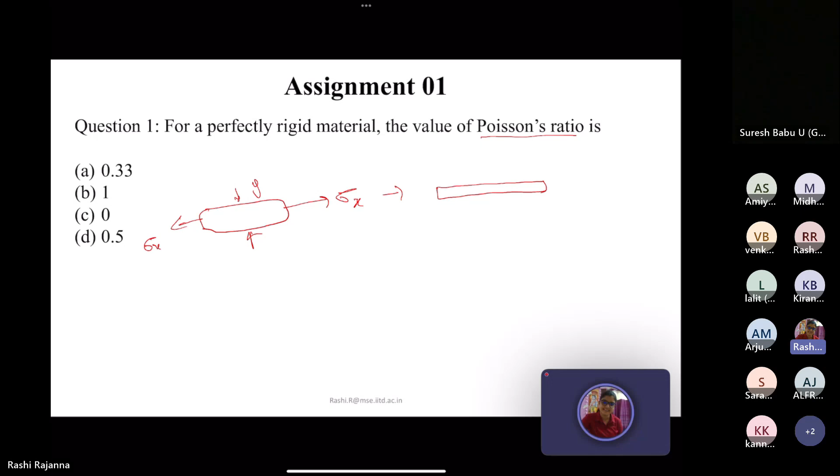That's the point. That's what the Poisson ratio gives us. When we apply load in the longitudinal direction, the direction perpendicular to that becomes the lateral direction. So how much the material gets deformed in the lateral direction is what is discussed using Poisson's ratio.

So consider the material was like this before, and it got elongated in this direction, and it initially had length Lx. So what will be this length? If the total deformation is delta Lx, what will be this? Delta Lx by 2. Correct. Delta Lx by 2, because it happens in both directions. In 3D, it will also happen along the Z direction. The variation in length will be there in X, Y, Z, all three directions.

And when we consider the strain of the material in the x direction, what will it be? The change in length, how much it deformed in this region as well as in this region, divided by the original length. So when you have to see how much it deformed in the y direction, what will it be in the y direction? Can anyone tell me?

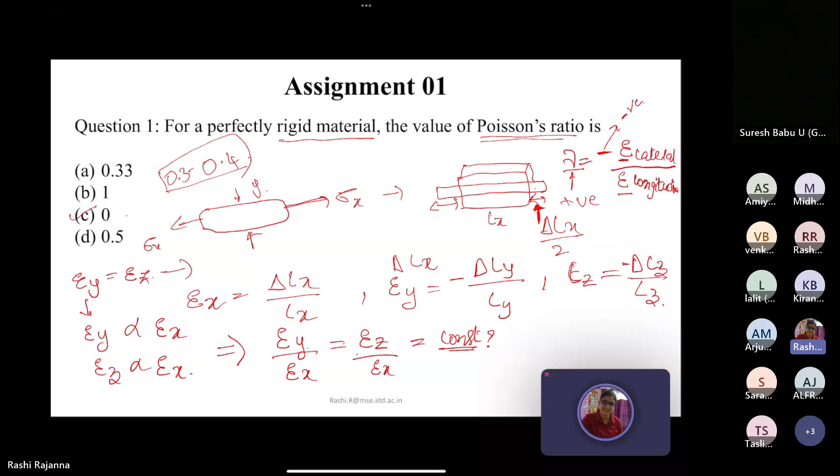What does a negative value mean in Poisson's ratio? Can anyone tell me what a negative Poisson's ratio means? Anyway, you can see it later and then let me know what the negative means. So the answer is 0. It's correct.

Coming to the next question. In the case of combined axial, bending and torsion loads, the onset of yielding in a material can be checked using? We will go. See, theories of failure. Theories of failure. Tension test. So how many are telling theories of failure is correct? And tension test, who was the one who said tension test? Kiran? Yes. And 5 theories, sir.

Yes, Suresh was saying something. There are 5 theories of failure. Is it? Yes, there are 5. We will be discussing each one among them. I just want the answer now. I want to see how many agree with tension test or whether any other answers are there. Suresh, what is the answer for this question? Madam, I thought it is theories of failure. I'm not very sure. How many accept theories of failure as the correct answer? I'm not sure actually. I don't know whether my approach is correct or not.

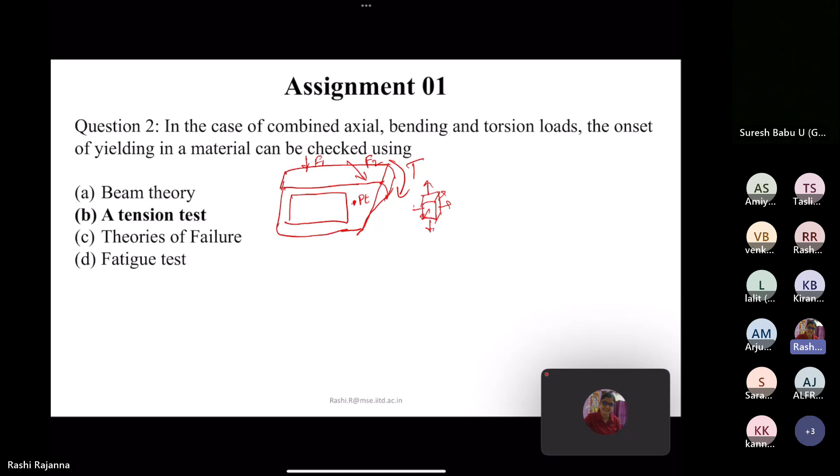So at this point there will be an infinite number of planes possible, and at every plane there will be variation in stresses. Wherever the shear stress is 0, in that particular plane, whatever stresses are acting are called principal stresses, and the plane in which they act is called the principal plane. So when shear stress is 0 at any particular plane, whatever values we get, sigma 1, sigma 2, and sigma 3, those are called principal stresses and principal planes.

I'm just describing this so that it will be easy for us to discuss the theory of failure. And then for the maximum shear stress, every time it is considered that sigma 1 is maximum and sigma 3 is the lower principal stress. So the maximum shear stress will be sigma 1 minus sigma 3 by 2. So we apply these conditions to the 5 different conditions we have seen previously.

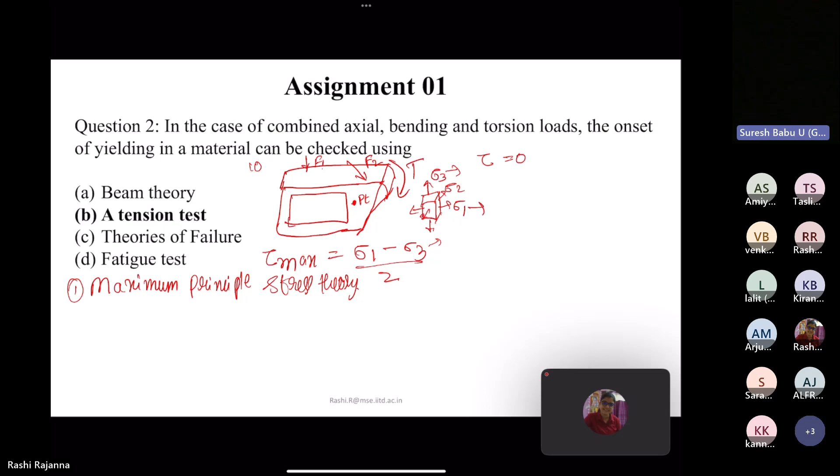If it is in compression. Okay. Yes. Negative means it is in compression, right? Yes. Sigma 1, sigma 2, sigma 3. Three stress values are there. The maximum stress value will be considered as sigma 1. The minimum will be sigma 3. Is it? Okay, you are talking about whether if it is negative, for instance minus 150, and then in tension it is 50 MPa. Correct.

It depends upon again. Even if you consider the opposite direction also, for instance, consider sigma 1 as 50 and this one as 150, it will become 50 plus 150 by 2, like it will be 200 by 2. So my maximum shear stress will be 100 MPa only, no? Even if you consider the opposite direction, whether the shear will be happening in clockwise or anti-clockwise direction, that only varies, right? Yes. Nothing changes much. This is just a representation, whether it will be in tension, compression, or shear in clockwise or anti-clockwise direction.

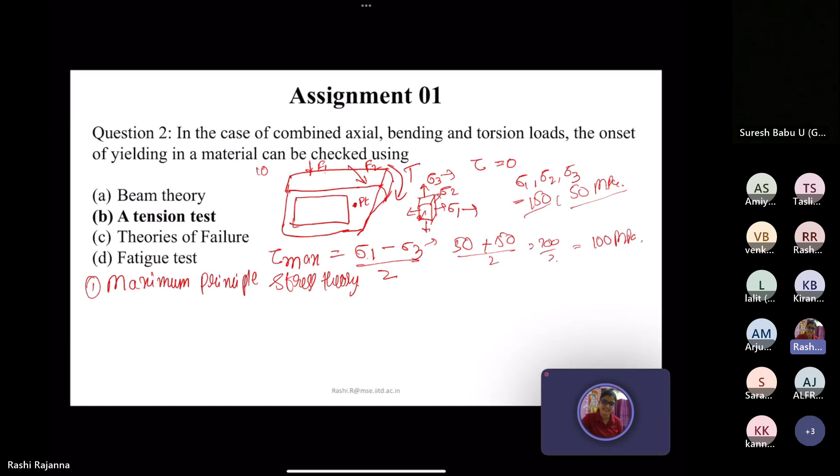Let us suppose minus 150 is there, 50 is there, and some other value is there, let us suppose 20. So we should consider the maximum one as sigma 1 and minimum one as sigma 3, that is minus 150 and 50 only. Whatever value is in between need not be considered. That will be sigma 2, right? Sigma 2, yes. That was the only doubt. Okay, ma'am. Thank you.

So for the maximum principal stress theory, we are assuming that sigma 1 is maximum for now. So sigma 1 should be equal to sigma y. This is how the maximum principal stress theory of failure is done, and this is valid especially for brittle materials. And the second theory we had was maximum strain theory.

So what will the maximum strain theory be now? Can anyone tell, looking at the equation? By Young's modulus. That's all, sigma 1 by Young's modulus. Whatever strain is present shouldn't go beyond the maximum principal stress, sigma 1, 2, or 3, whichever is maximum. It should be well below that. This is not used much, even though it is one of the theories, it is not applicable much for engineering materials.

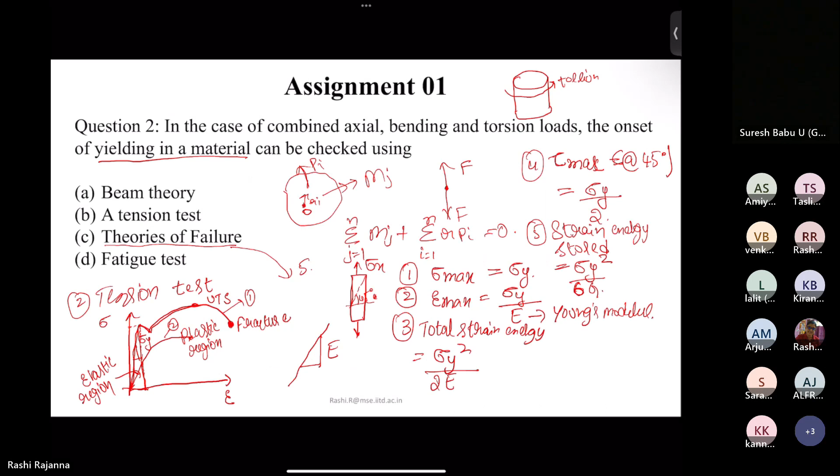Yeah, as you can see here, the maximum shear stress occurs at 45 degrees, related to sigma y. Sigma y is the material's yield strength, and we have to work well below that. In terms of principal stresses, the maximum it can have is sigma 1 minus sigma 3 by 2. This is the maximum shear stress that can happen in the material, and it should not be more than sigma y by 2, right?

So it means that sigma 1 minus sigma 3 should be less than or equal to sigma y. This is the Tresca yield criterion, and it is famous and used for most materials. Can anyone tell me what is the next theory? Von Mises. Yes, von Mises theory. Just write it down here.

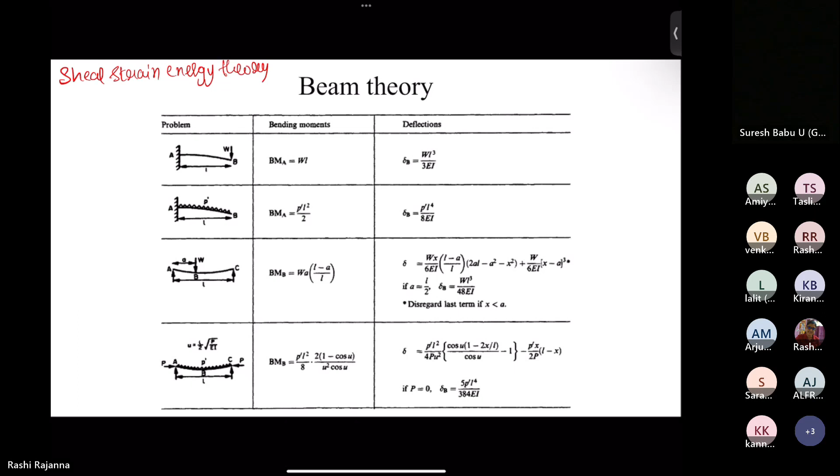And fatigue test, when it comes to fatigue test, I'll just tell it down here, or I should write down here. I have not signed in to this account, and it's kind of difficult to add a new slide for me.

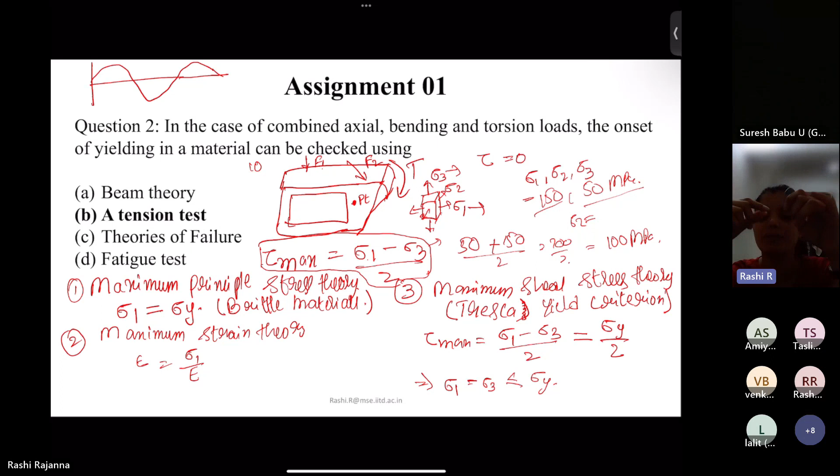So we will be expecting the material will not fail. If I keep on doing this with a pen cap, applying a very small load, if I don't try to deform it very much, then I can keep on doing it forever. Even though some amount of stress will be happening inside the material, it will not fracture or anything.

So consider I apply more load, and I give a very good amount of deformation, and I'm getting it back, and applying again, getting it back, applying again, getting it back. It will break. It will not take many cycles to break the material, even though it depends upon how much stress you are applying. Lalit, you have some question?

Yeah, so I just wanted to know, the load which you are applying, will it remain constant or will it be fluctuating? See, during the fatigue test... in real application, obviously the load will not be constant. But for the sake of simplicity, whichever test we do, we do it at constant load.

Or at constant deformation; there are different types of tests for fatigue also. But the amount of load that you give will be kind of constant, so that you'll be able to understand how load is going to affect the material properties. So is there any test in fatigue testing where we can apply fluctuating loads, because that more resembles the practical application?

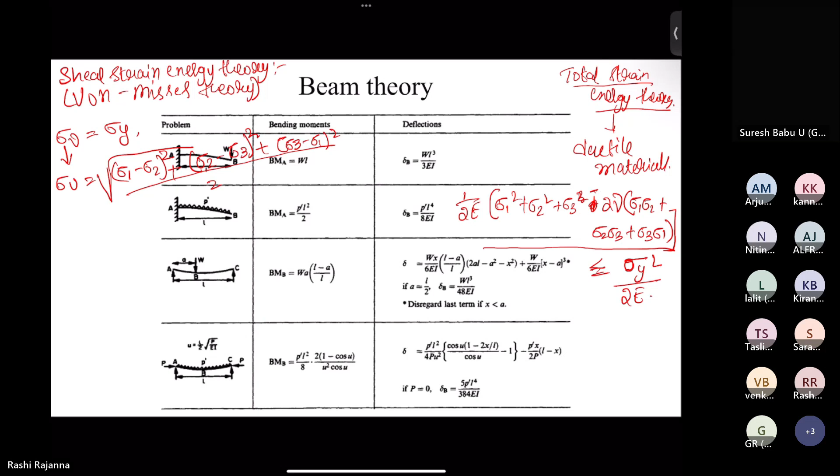So according to Tresca's, next question we will go. According to Tresca's failure criteria, the material will fail when the maximum shear stress reaches. We just now discussed all the 5 theories.

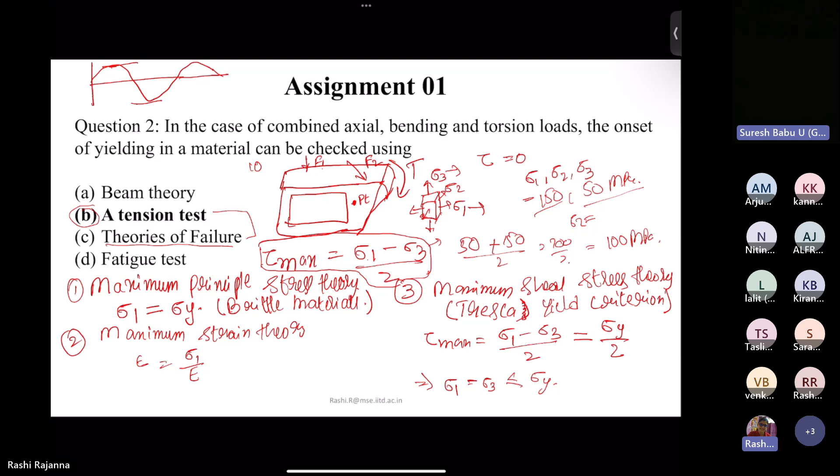Sigma y by 2, it was there anyway. It is easy. So, can anyone give this answer?

Von Mises criteria, yield criteria, onset of yielding takes place when sigma 1, sigma 2, sigma 3 are principal stresses, and sigma ys is the yield stress, they're telling. So what will be the von Mises criteria? What is the formula? It is straightforward.

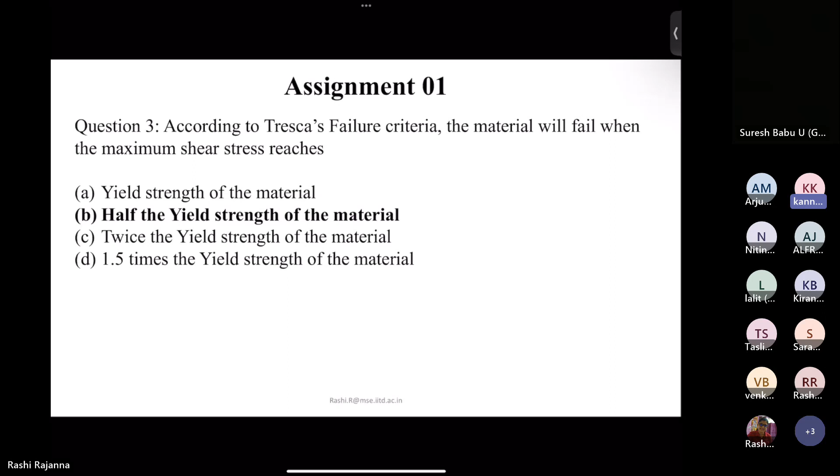it is given equal, even we can consider it should be less than or equal. Whatever the stresses at any point, the von Mises stresses should be less than or equal to - this one should be greater than. Von Mises stresses should be greater than the principal stresses acting in the material.

So this one will become greater than or equal to sigma 1 minus sigma 2 the whole square plus sigma 2 minus sigma 3 square plus sigma 3 minus sigma 1 the whole square. So when you shift it to that side, it will become less than or equal to, so the answer will be C.

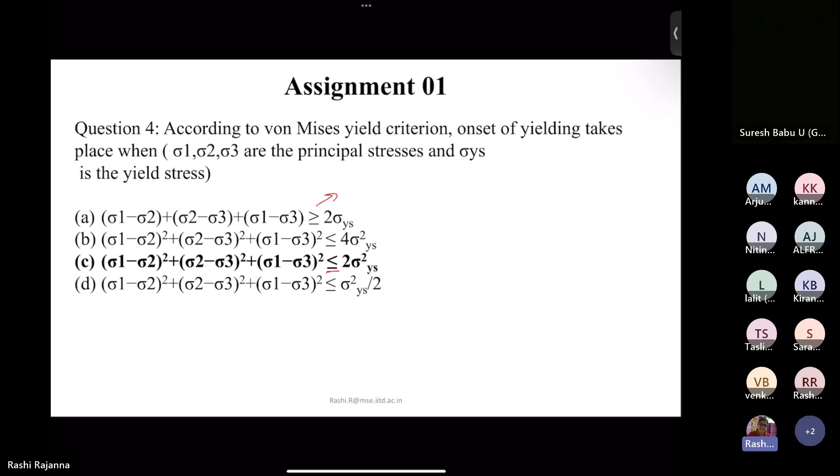So from this point, from the fifth question, we just now discussed about fatigue. I hope everyone are able to see the slide. From a theoretical standpoint, when a material is subjected to fatigue below the endurance limit, the material will - dash like what? What is the endurance limit, by the way?

Can anyone tell me? Can anyone discuss a little bit more about fatigue? Lalit, I think so, you are doing some fatigue test, no? I'll give a guess, ma'am. So can anyone tell me a little bit about fatigue? Ma'am, what can I give, exactly guess?

You asked us about the endurance limit, right? Can I add something on endurance? Yes, sure. If I remember correctly, endurance limit is one below which there will not be any fatigue failure. Yeah, correct, that's true only.

That is theoretically anyway, so theoretically it was actually also given. The actual question was, what is endurance limit? I did not ask for the answer actually, even though the answer is correct. I was asking what is endurance limit - it is the maximum stress at which the material will not fail at all.

What is the maximum stress like where? Which maximum? I need proper answers. The maximum stress it can take for unlimited number of cycles. You mean to say the cyclic stress amplitude? Yes. So below a particular amplitude, the material will not fail when we are doing cyclic loading. Yes ma'am, correct. That is endurance limit, usually seen in ferrous materials.

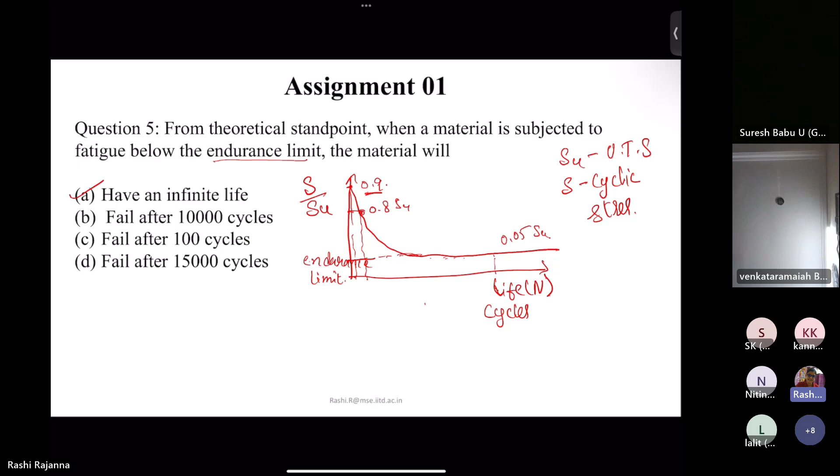This is endurance limit. So theoretically, if you apply stresses well below the endurance limit, it should have an infinite life. But that's not the case usually, how it will be present.

Anyone else has any other answers other than this one? I hope question five is also clear.

Yes, yes. Actually I recently learned that this applies for ferritic materials, right? I just recently learned that the exception for this case is stainless steels. Okay, just information, I actually couldn't hear properly, can you tell Kanan properly again? Yeah, it's Kanan, right? Yeah, correct. Yeah, the endurance limit, you're telling that it applies for ferritic materials only.

No, only for ferrous materials. Yes, it's only for ferrous materials, right? I'm right only, right? Yeah, I mean, so stainless steels are also called ferrous, it'll be classified under ferrous materials, right? Yeah, stainless steel also is classified under ferrous material only. Yeah, but I recently learned that stainless steel does not have any endurance limit. It is endurance limit is usually mentioned for ferrous material only, but let me check that point also.

That question also, yeah, this is as per API 579, you can take a reference of this. Yes, that will be better. API 579. Okay, thank you.

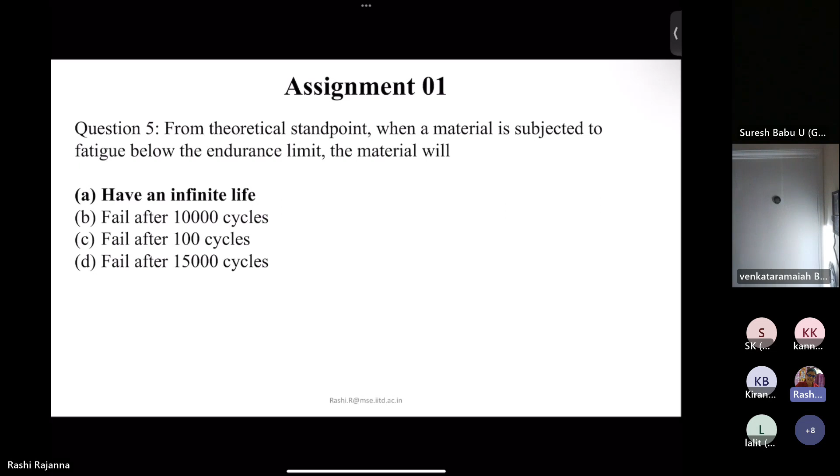Yes, yes. So comet disaster failure, we have seen a few failures in the material, like we've seen a few case studies. One among them was the comet disaster failure. That comet disaster failure was which—can anyone at least tell, what was the instrument, whatever the structural... what was comet actually?

Did everyone see the lecture? It was the first jet airplane. Yeah, it was the first commercial jet, correct—high speed, you can fly at very high speeds.

So what variation in material behavior with temperature did that have? There was no much variation in temperature. Of course, there will be variation when you compare with different places also, but that was not the reason—that was not the underlying reason for the failure of the material.

And the importance of stress concentration, stress corrosion, and design for corrosion prevention control—that was also not the reason. As I wanted to mention, corrosion also is very important. It not only corrodes the surface of the material, it also makes a few pittings, very small pittings will be formed. For instance, consider there will be a smooth material, roughness is very low. But when corrosion happens, the corroded layer starts forming on the surface. This corrosion usually forms oxides. Just wanted to discuss a few things, and then below that will be metal mostly.

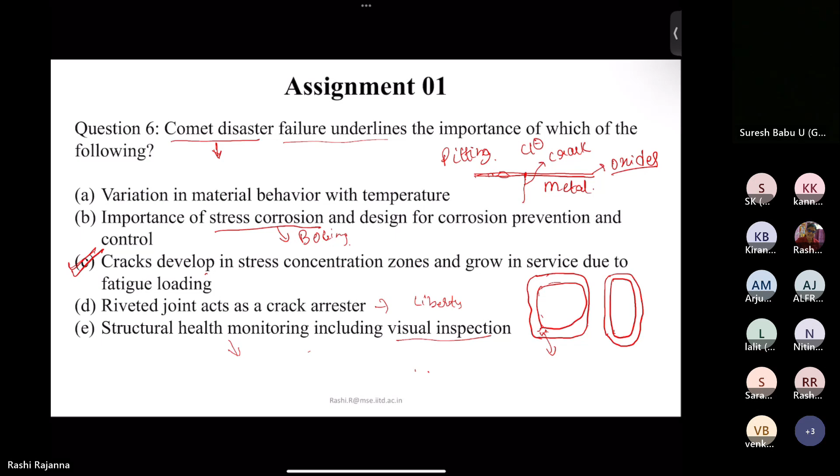I think so, but that flight was a Boeing only, if I'm not wrong - Aloha one. Yeah, it was a Boeing 737-200, in 1988. These case studies are actually very nice and interesting to study.

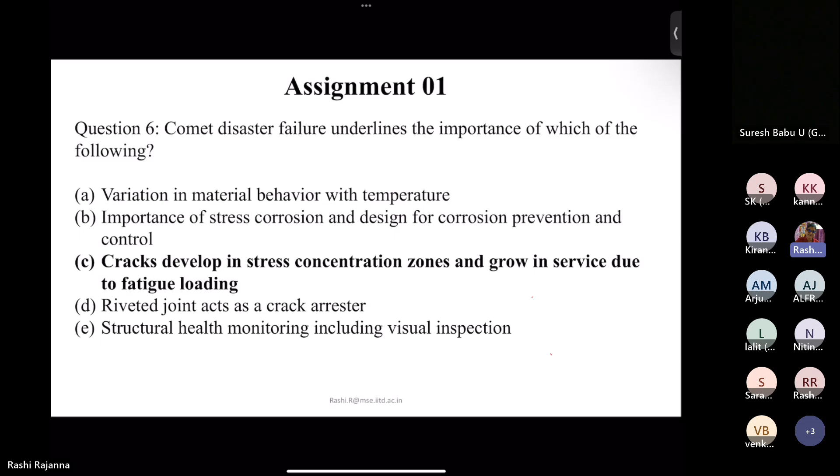Anyway, moving further - for materials used in nuclear reactors, nil ductility temperature (NDT) changes are studied by placing the specimen inside the reactor. We have 20 minutes and still so many things to discuss. Nil ductility temperature is the temperature below which the material behaves like a brittle material, and above which the toughness, measured against temperature, of the material is high.

What can anyone say about why brittle material has low toughness compared to ductile material? Because the plastic zone is very small, the overall area under the curve will be small compared to ductile. In brittle material, the stress versus strain curve looks like this, and then it fails here. In ductile material, it looks like this - so this is the ductile material, and this is brittle.

The area under the curve for brittle material will be lower compared to that of ductile material. So the toughness of the material will be higher in ductile material compared to brittle. So with increasing the temperature for any material, it will be kind of like this. So the toughness actually shouldn't drop. If the toughness has dropped, it means that the material is not suitable for our application.

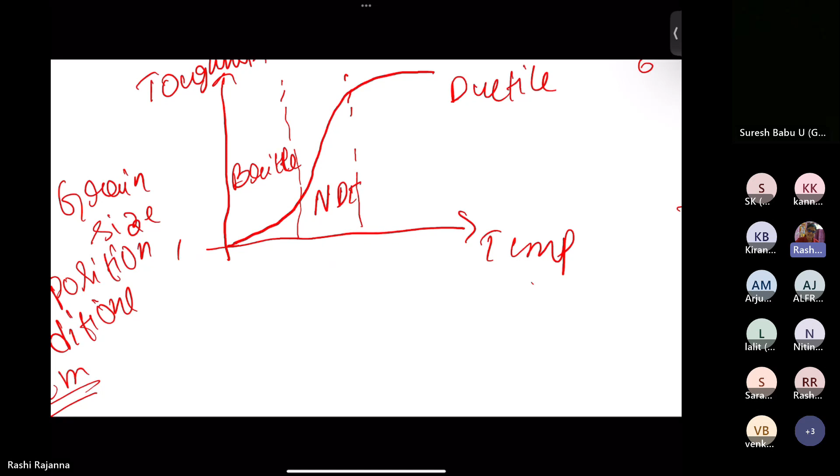So grain size of the material, how the microstructure is distributed, microstructure, grain size, and then composition of the material, and what conditions, whether it is in ideal condition where it is dry, or in radioactive condition. The atmosphere in which we are using the material also will matter. So the microstructure of the material, the temperature, the composition, and the atmosphere in which we are using the material, all these things will vary the nil ductility temperature.

For instance, if we are keeping the specimen inside the nuclear reactor, it means that it is getting exposed to all the radiations present. So the nil ductility temperature gets shifted to the right. Can anyone tell me why the shifting to the right is a good thing or a bad thing, and why? Can anyone volunteer to tell me? It's a bad thing.

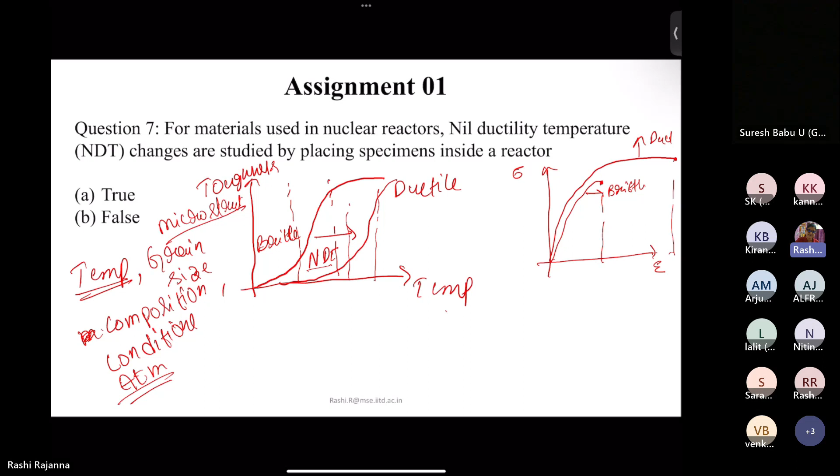It is not desirable, I think. Why is it not desirable? Because you will want a metal to be ductile rather than brittle. I mean, you want it to exhibit some plastic deformation before failure. Is that the reason? So Arjun, if the nil ductility temperature increases, your metal will behave as a brittle material for a higher range of temperature. See, the range is same. Both the places range is same approximately.

But when the nil ductility temperature increases, can we say that the metal exhibits a more brittle property for a larger temperature range? Even at higher temperature, it will be acting like a brittle material, so it's not so desirable. Shifting right is not desirable. Yes, it's correct. I was just asking you a question. Whatever Arjun was telling was correct. Shifting of the curve to the right side is not desirable. If possible, we have to shift it to the left side.

We do microstructural changes, compositional changes, everything in order to shift the S curve to the left side, not to the right side. Because of radiation, it will be shifting to right. For material in nuclear reactor, the studies can be done in such a way we can keep the samples inside the reactor, take them out after some time, test them at different temperatures, and see the NDT at lower or higher temperature. So the right answer for this one is true.

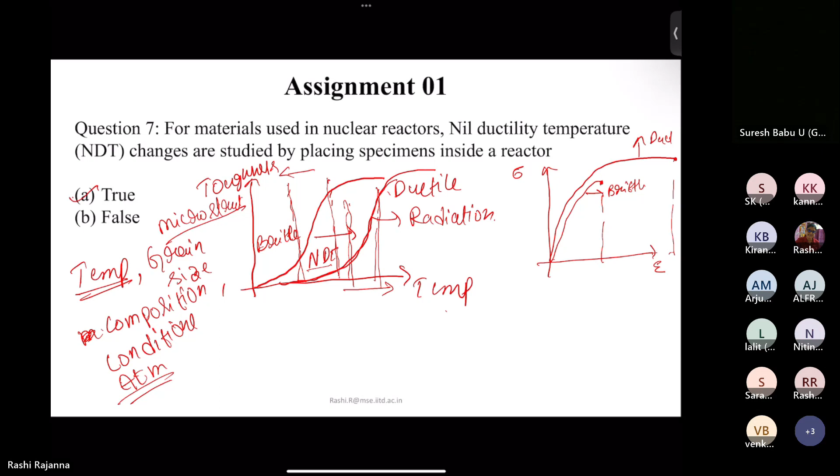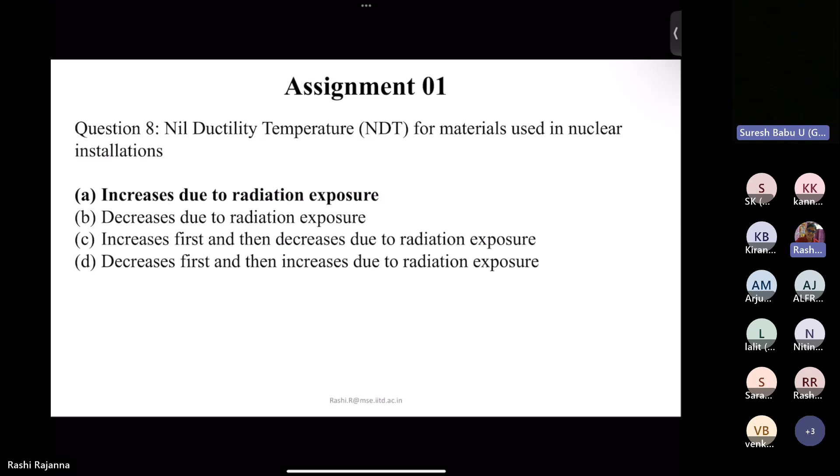Then, so now you guys answer this question. Nil ductility temperature for material in nuclear installation is blank. Answer soon so that we'll go to the next question. A, increases due to radiation exposure. NDT increases. Yeah, correct. It's right. The contours of constant color in photoelastic experiments are known as?

Yes, come on. Isochromatics. Yes, isochromatics, correct. I thought of discussing a little bit more on photoelasticity. Probably in the next class I'll discuss photoelasticity in a little more detail. I am pretty sure you all are mechanical engineers and you know all these things well, but I thought of revising the terminologies once. So in the next class, we will first start with photoelasticity, then revise the terminologies, and then go to the next topic.

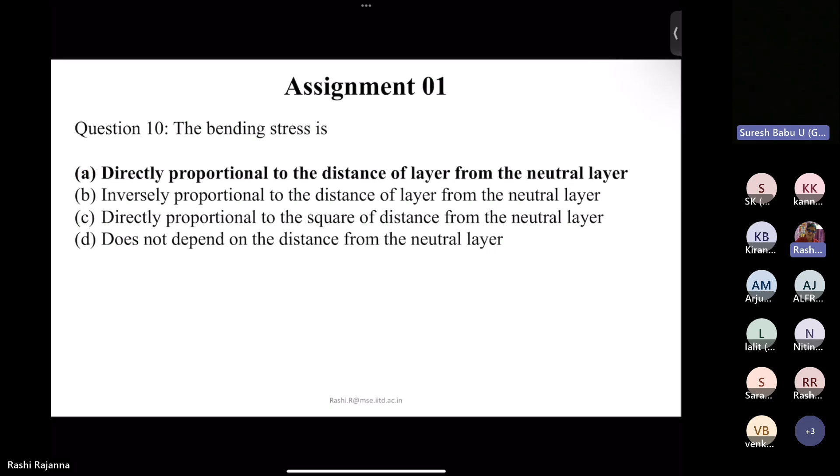So yeah, for isochromatic. The bending stress is dash. Come on, this is an easy one. Everyone should be able to do it very fast. Is everyone able to see my slides? Directly proportional to distance of layer from neutral layer. Yes. So I don't have to explain this in detail. We will see what is required.

So just tell me one thing, which stress will you consider? Just tell me that, that's all. Which is the maximum stress that you have to consider? Yield point stress. Yield. Yes, correct. Exactly, that's the major point here. Even though UTS is given as 460 MPa and yield stress is given as 370, as this is a ductile material, we should consider only the yield stress.

So for the factor of safety, which is given as 2, we take maximum stress divided by working stress. The maximum stress we have to consider is 370 MPa. As the factor of safety is 2, divided by 2, the maximum working stress we can go up to is 185 MPa. And they have mentioned that the load can go up to 10 kilonewton, so P max is 10 kilonewton. Sorry, not 10 Newton.

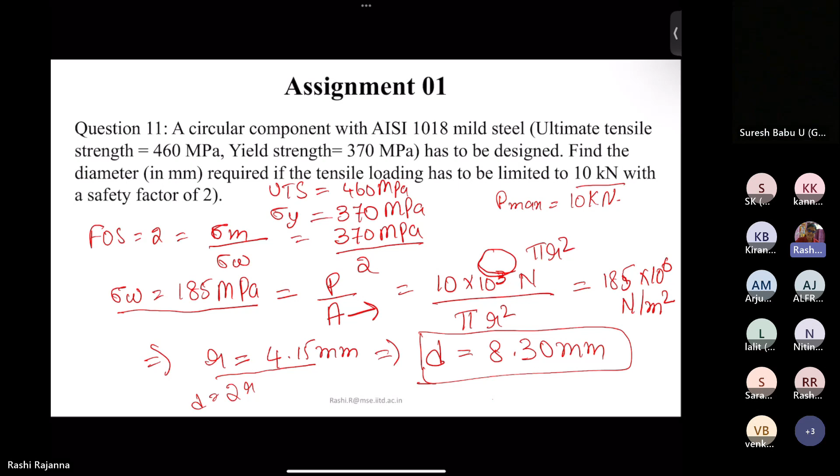Further, if you solve for R, we will get it as 4.15. They asked for the diameter D in mm, so it will be around 8.30 mm, since D is equal to 2R. Is everyone clear with this, or does anything have to be further explained? We can go in detail also, that's not a problem. It's clear. I'm just rushing it because of the time limit.

So answer is... sorry.

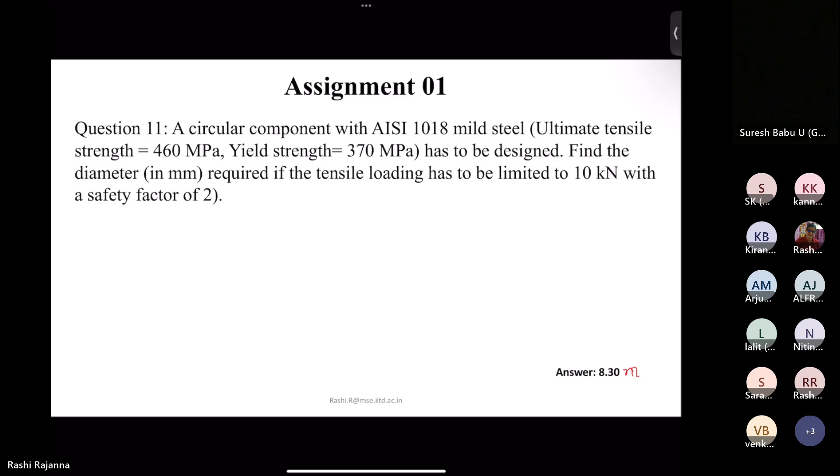So from the lessons of different spectacular failures, what are the major things we can conclude? There will not be any visible plastic deformation before every failure. Is it true? We cannot say that before every failure plastic deformation is not there at all, but yes, that's true actually. The second point is not true: there will be visible plastic deformation before every failure. That did not happen; there was not much plastic deformation observed before failure.

This is correct, as we have seen, whether it is the Liberty ship with ductile to brittle transition, or Aloha because of stress corrosion, or Boston or Comet, not much plastic deformation was observed before failure. The structures made of ductile material fail in a ductile fashion only. It's not true; structures made of ductile material can fail in brittle fashion, but it is not true that a ductile material has to fail in a ductile fashion only. Most ductile materials used in structural applications still failed in brittle fashion. So the factor of safety should be always less than one.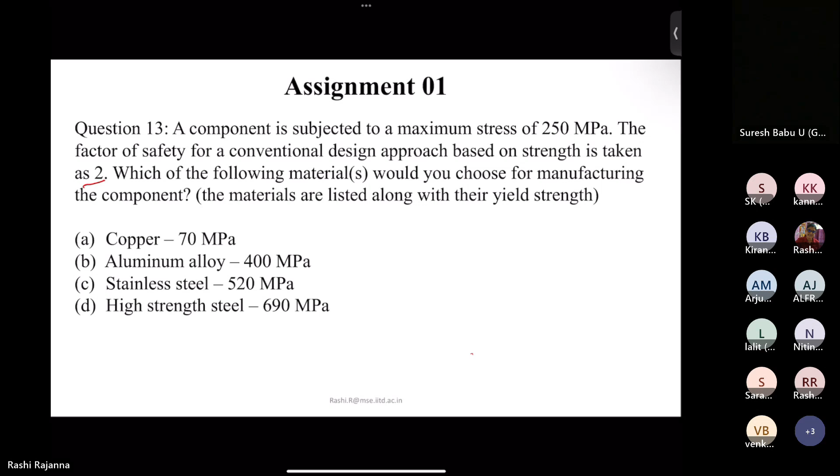So this is C and D. The answer is C and D. And for the 14th question,

we'll wrap it up soon if you guys give answers soon. I wanted to discuss further, but I did not expect that I'd be consuming so much time. I'll try to do the time management better from next class.

So for question 14, can anyone give me the correct order? Figures A, B, C show. Huh? CBA. CBA, correct. Anyway, it's CBA only. And you guys know how it is done also, right? So I don't have to further explain. But in the next class, we'll try to brush up on photoelasticity, the basics of that. We will see what each and every terminology means, so that it will not be difficult for us further.

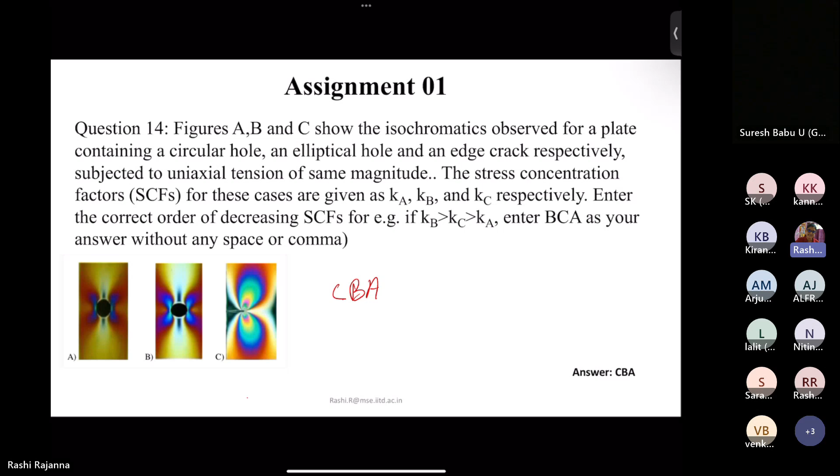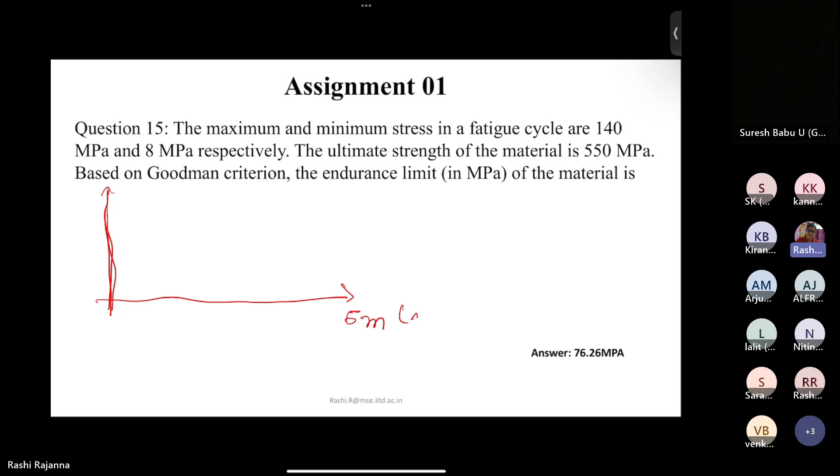So when you plot mean stress versus stress amplitude, you can see that failure can happen in this fashion, and the points will be in this region. It will be in a parabolic manner. Every time you will get the points in this region, plus or minus. This is given by the Gerber parabola. Most of the failure points will lie in this region only. So we have to keep the material in such a way that it will be well below this parabola.

Different people have given different parabolas or lines, and that's what we'll be discussing, and where it will be, what's this called, the endurance limit. So from the endurance limit, usually fracture will be happening at the ultimate tensile strength, UTS. So if you have a line which connects these two rather than a parabola, all the testing parameters will be well below this line, so that we will have better safety rather than being just near the failure points.

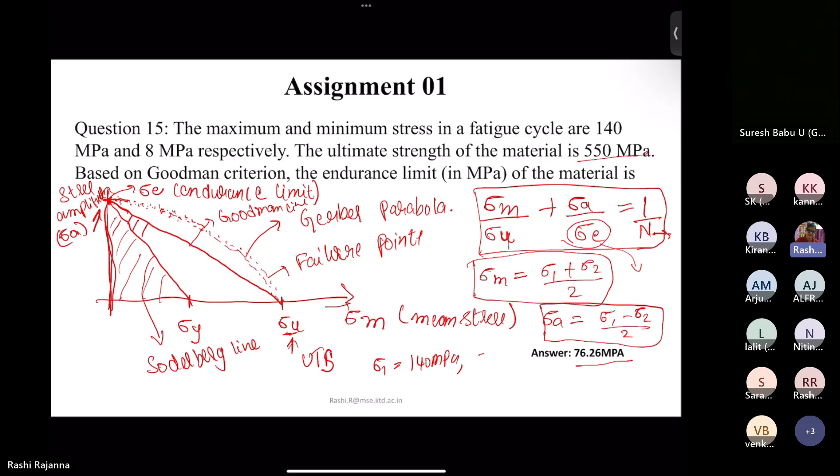What is the sigma 1 given? 140 MPa. Sigma 2 is 8 MPa. And then sigma m will be what? 140 plus 8 divided by 2. This will be 74 MPa. And then sigma a will be 140 minus 8 by 2. 62... 66 MPa. So

74 divided by ultimate tensile strength 550 plus 66 divided by sigma E is equal to 1. Can someone tell me the value of 74 divided by 550? And this will be 1 minus 66 by sigma E. It will become sigma E minus 66 by sigma E equal to 74 divided by 550. 0.135. So 0.135 sigma E. Solve it for sigma E. Can someone solve it and tell me what is the value?

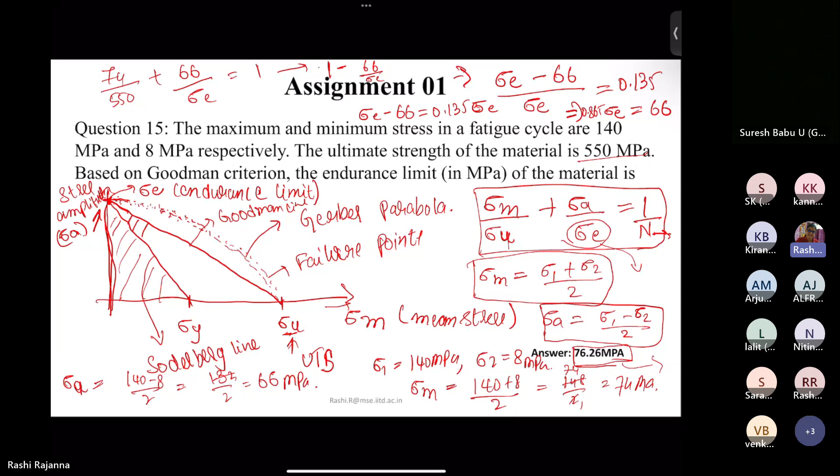So Mohr's circle we will discuss in next class. For now, we will stop it. I will discuss a little bit in detail about Mohr's circle in the next class. Then I'll not give the introduction in the next class, and then we will have a photoelastic thing also. These 2 things I'll discuss in the next class. Is that fine, or do you want me to discuss them now?

One general suggestion. As you indicated earlier, for time management, you wanted to compress. So I would suggest not to compress your sharings. If everyone agrees, maybe the time may be slightly extended. No, I really don't want to do more than 2 hours. 2 hours is fine for me. When will be the next class, madam? Next Tuesday again. If it is convenient for everyone, we can proceed with Mohr's circle for now. Yes, please. We will finish this week. Okay, we proceed. Just giving 5 minutes at least. I have to tell from the beginning then.

I wanted to discuss basics also for Mohr's circle. I have actually written 3 pages. If we discuss now, it will go very fast actually. I wanted to show how the stresses vary with varying the angle, if you are applying any load and trying to shift the angle. Madam, please move on to the next class only. Yeah, that's what.

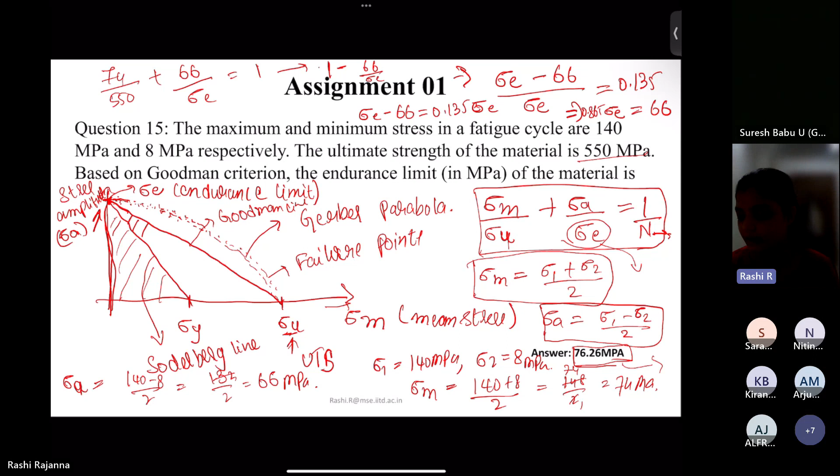Madam, you can make a little PPT and write over that. Everything need not be written; sometimes time can be saved. Suppose this Goodman line, this parabola, these things can come in a PPT and you can keep writing over that. Yes, I'll try to do that. But this was my first class, so I did not expect how much time it would take. I usually do 10 questions in 2 hours, but sir kept up to 15 questions. I think every assignment will be like that, so yeah, I'll do that.